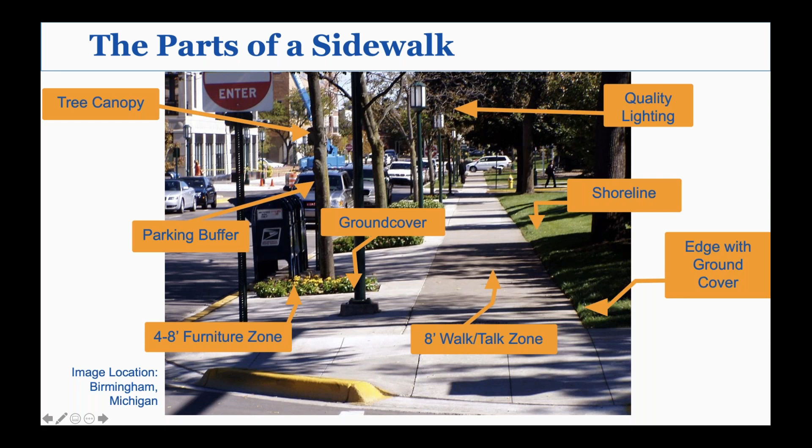I'm going to give you just a real brief element on the sidewalks. Last time we met, we were able to cover comfort, width, condition, setbacks -- very important -- the feeling of security, and the level of shade. So just real quickly, I'm sharing with you some of the nomenclature that comes to us through engineering, through landscape architecture, and additional language that we develop just to enhance and improve walking. These are just examples of those elements of a sidewalk.

So I wanted to show the diversity of sidewalks. But let's start with fresh material now. As I mentioned, we always get into crossings. It's just essential. If a person can't get across the street, then we don't have good movement, and we don't have opportunity to move from place to place, visit shops on the other side.

Whenever I can, I will lead a walking audit, or precede a walking audit with an in-workshop setting, maybe just 20 minutes, but I like people to understand the complexity that the engineer faces to make crossing safe.

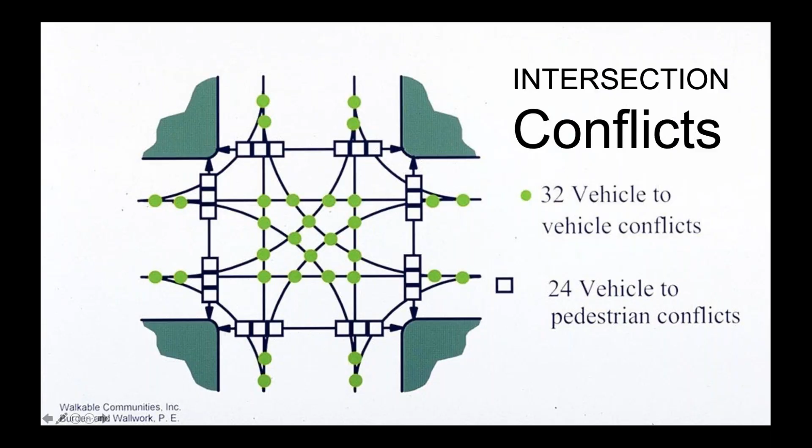Intersections by definition are a place that you go to have conflicts. For pedestrians, there are 24, you can see them mapped out here. And it's a very complex thing to build a safe intersection.

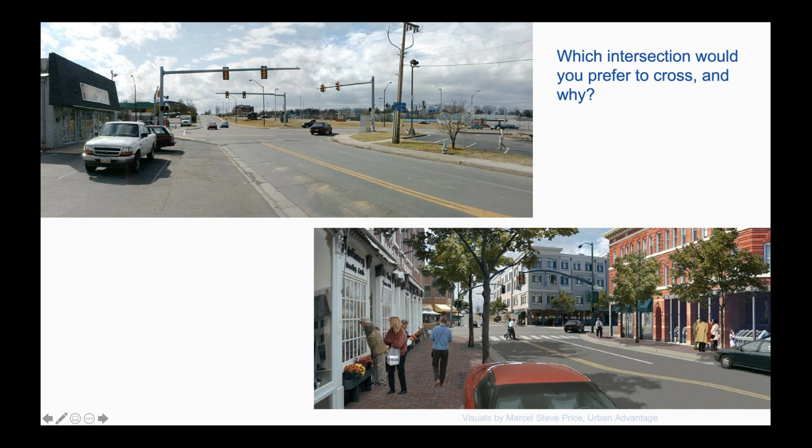So this is an important point. Let's see if, there we go. Now let's get into the non-signalized intersection. They're the simplest to introduce, but we have many issues.

The markings, what is the speed of traffic, the width of the curb radii - I really want to make an emphasis on that, and we'll talk about that. What is the proper lighting? Any intersection should be well lit. And then what's the visibility? And then the type of traffic control.

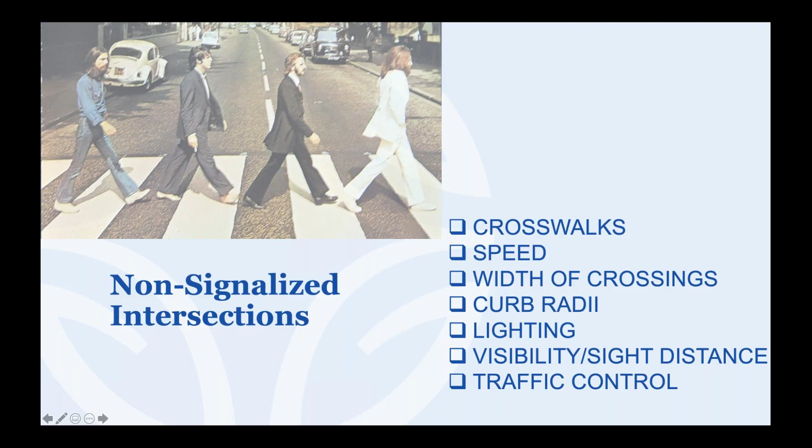So let's start with one of the most important, and that is the radius. Here's Kara Seidemann in Cambridge with probably a 2 foot - what would you say, Mark? A 2 or 3 foot radius? Yep, outside. Yep.

Here's Michael Wallwork, where he was actually almost taken out about 6 seconds after I took this photo because the radius is so wide. Even though he had the green signal or the walk signal, the motorist was not going to yield to Michael. So keeping the radius to the right level is the most important thing to do to come up with a compact intersection, whether it's signalized or unsignalized.

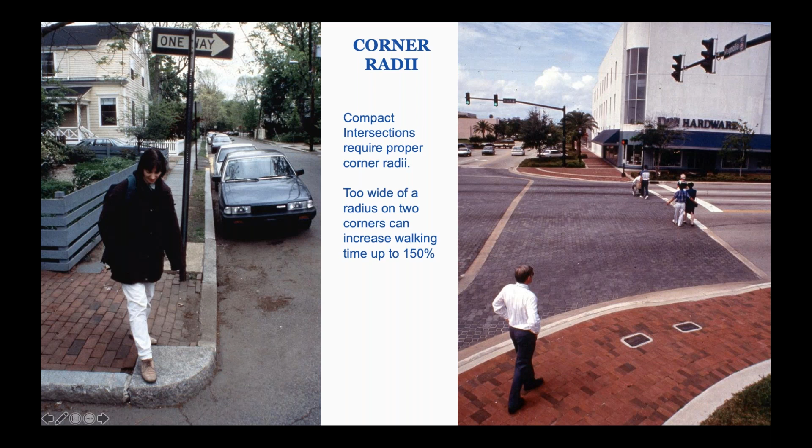So as a compact, unsignalized intersection, be thinking, if you would, what treatments you see here that you like and which ones you might enhance. In just a moment, I'm going to ask Mark to talk about the things he sees here, and then I'll show the answers I've come up with.

And I have to acknowledge something really important. We'll get in conversations where somebody will say, yeah, but the biggest fire truck in the fleet or a tractor trailer truck can't make it through here. And so there are two questions. Question number one is, should a tractor trailer be able to get through this street? Maybe the curb radius doesn't have to accommodate that.

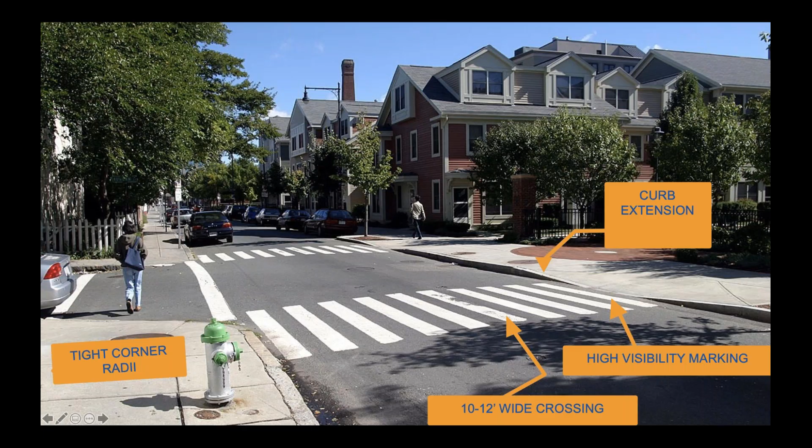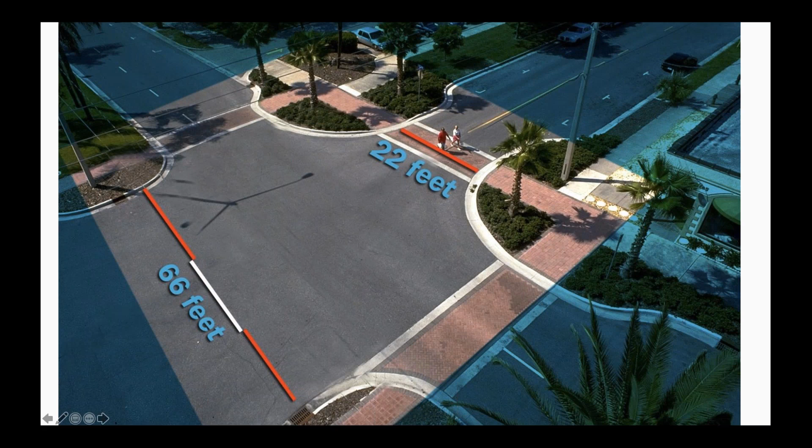To really make that point about the importance of curb extensions, notice this intersection has 66 feet if it does not have curb extensions, and only 22 feet of exposure. Much better sight lines for motorists to see pedestrians, and likewise for pedestrians to see motorists. Really powerful effect.

Now let's go to the tough one: signalized intersections. Again, we look at almost all the same categories, but we now add in some other tools that become important when we apply them. So let's get into the details.

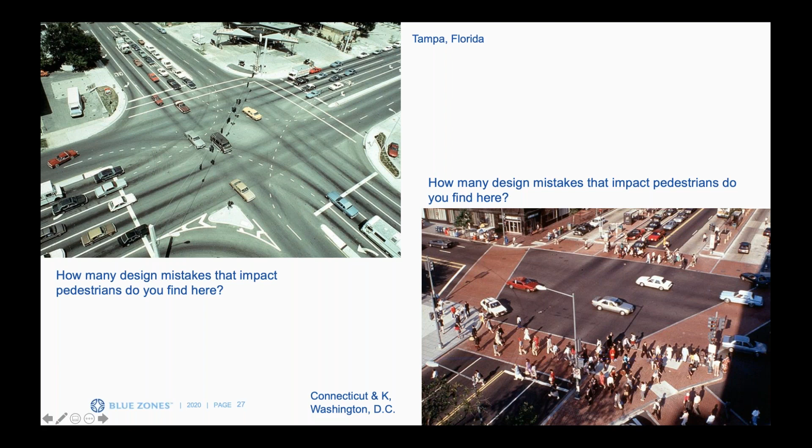But the one up on top may be in the bottom third of the intersections I found. In fact, notice there are many mistakes. I count 48 different mistakes in the ones you see here.

Another one that I like to accent the qualities of a good compact but signalized intersection. This had been a 4-lane street, now a 2-lane street, but widened at the intersections - that's where you perform all the work. Notice how narrow the crossings are. The radii are as tight as they can be within reason. When you add bike lanes, you can tighten down the radii even more, simply because the receiving width becomes greater. Same thing with parking if you didn't have curb extensions.

Mark, what would you add to this? What do you see that you like with this particular intersection?

I'm pleased about how they deal with the transit stop, keeping it central - so often we see transit stops down the street. We don't talk a lot about transit during this workshop, but frequently in our walk audits it's central. If you look closely, you'll see the transit stops on both corners are close at hand. If you put a transit stop at mid-block, you make users go way out of their way or cross mid-block, right? It's a little thing we sometimes overlook, but not on the walk audits - we make sure to talk about transit too.

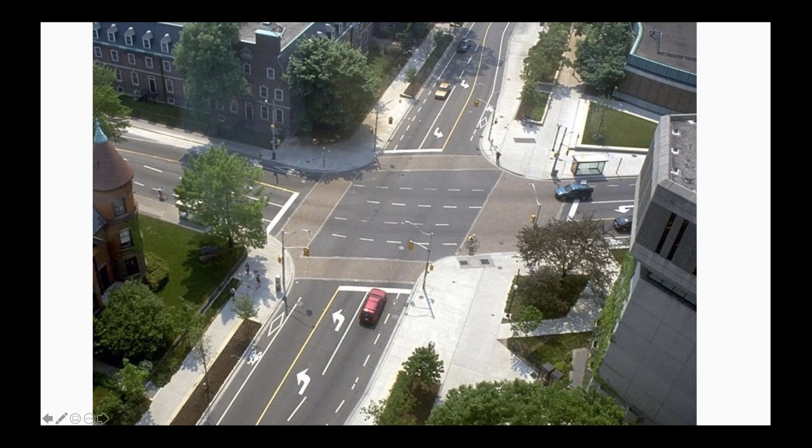Excellent. Now I'm going to do a quiz for everybody here. This won't be a poll just for time's sake, but notice this intersection has 4 different crossings that we call pork chop islands - if you look at them from the sky, they actually look like a pork chop. But it seems like they assigned a different engineer to each of the 4.

There's one that's much safer than the others. I hope each of you picked number 4. It brings the motors in at the lowest possible speed, gives them the greatest sight lines, and it's not even perfect - pork chops can be designed so much better than these.

But look at number 2. Motors could enter that crossing easily at 30 miles an hour, and the faster they can go in, the less likely they're going to yield to a pedestrian or even see them. So again, this one is kind of bizarre - it's as though they had no rhyme or reason for what they did, but somehow by chance, number 4 turned out to be a better intersection crossing.

Can I throw a point in here quick, Dan? Oh, please, let me go back. One of our jobs, and it's great - illustrate it with that photo. Go right ahead to the photo.

Remember where the driver is looking as they're entering these slip lanes, the right turn lanes - the driver's often looking left to check whether there's traffic in the lane they're entering, meaning they are not looking right toward where the pedestrian could well be stepping off the curb to make the short crossing from the curb to the crossing island. So if you think about a driver who's looking left, you've got to think about what you can do to give that pedestrian a better position - more visible to the driver, not letting them sweep into the turn at speed, knowing full well the driver's actually often looking out at the travel lane.

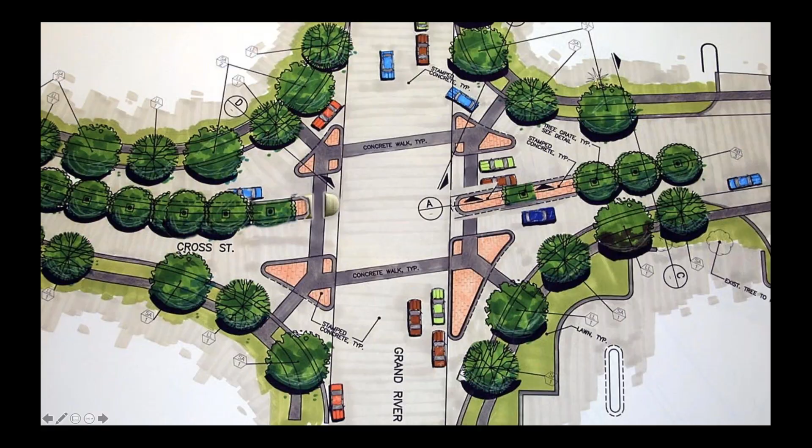Dan, you back with us? It looks like he's offline right now, Mark. Oh, all right. If you'd like, we could switch to me. Maybe we should. Why don't you go ahead and give me the screen, guys. And Mark, I know Dan is actively trying to rejoin, just an FYI.

Okay, go ahead. What Dan's going to do is have us look at a few more intersections here, and he does some really nice pre and post work. So again, we might on the walk audit ask people to experience this intersection, either look at it or even cross it, if we can do it safely with the group during the walk audit, and then say give us a score, how do you like it and what does it do? And then what we really love to do is invite them to imagine how they might improve it.

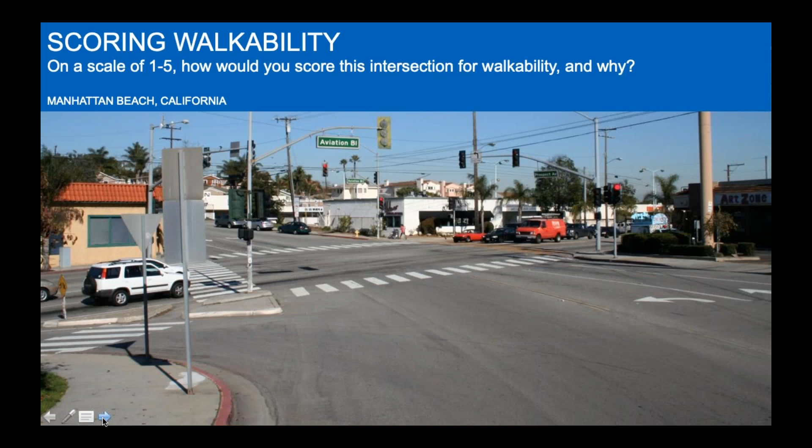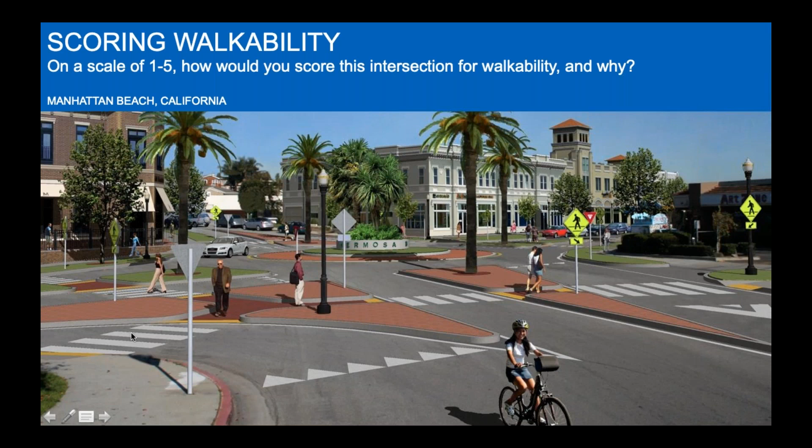So we might say, you can even render that. So this is actually a photomorph, a rendering of how that intersection could be done as a single lane modern roundabout. And by the way, one of the ways to keep the capacity up if you need it is to still keep turn lanes, slip lanes like the one here on the right. So there is a pork chop island here, but notice you've broken the pedestrian crossings up into a lot of individual one-lane crossings. No pedestrian is ever facing multiple threats at any time, even if you do allow for this right turn vehicle movement.

So these are important things to think about and to get participants to imagine when you're out there doing the audit, to paint some of these pictures. Often Dan will give a talk beforehand and show images like that and ask, what could you do with this intersection? What do you like about it? What's working for you, what's not? And this is a great example, by the way - this is the perspective of the driver who's coming in. If I've got a green light right here, I could well be just looking left, seeing if there's traffic coming from the left, before I make my decision to go right here. So we want to be very aware of that.

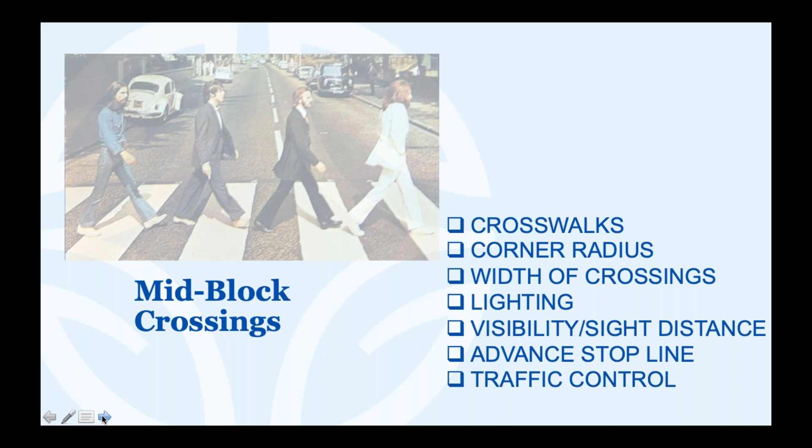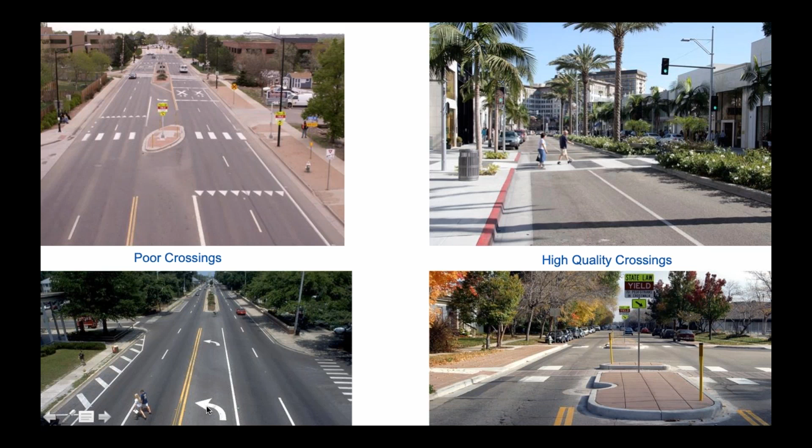Again, we're back to this idea of separating the task, allowing the pedestrian to cross with a finite number of well-defined conflicts rather than having to run out to the middle. Because we regularly see pedestrians in the picture in the lower left, literally going out and using the turn lane, as you see with the two pedestrians at the very bottom of the left picture, using that turning lane essentially as the median. They'll get halfway out, wait for a break from traffic in the other direction before moving ahead.

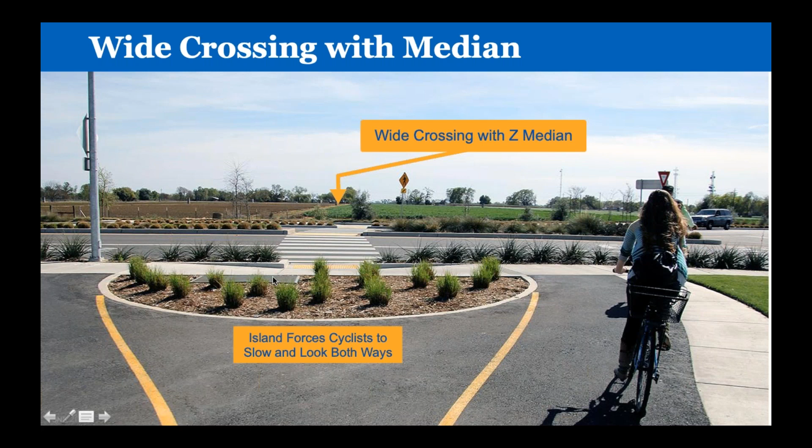Based on volumes, based on speeds and other issues, what additional tools the engineer brings in. Let's go to the next Davis mid-block crossing. Do you want to mention that the Z offset here also forces the pedestrian or the cyclist to look toward oncoming traffic as they pass the center island? Just to make sure that combination is really improving user eye contact in both cases.

I have mixed feelings about this one. I love the width, I love the fact that it's a raised crossing that slows the motorists down. I am not an advocate of putting posts where the pedestrian or bicyclist is having to deal with encumbrances put into trails, but they've done a splendid job in bringing the speeds down and putting a number of the other elements together. Mark, what's your feeling on these post-mounted posts?

You can't help but, if we're really trying to do inclusive design and think about people across the spectrum of ability and disability, a visually impaired pedestrian could walk right into that - there's no curb level warning if I'm using a cane, for example, to warn me of this. So from a design standpoint, we'd expect a more thoughtful application. If we think we need to put posts there to keep vehicles from turning onto this, recognizing it's not a motor vehicle lane, then let's think about how we do it in a way that's going to work for all users, including a visually impaired user.

Absolutely. And on the next one, I love these lean rails - it's a tool I picked up in Australia and brought back to the country, and it allows the bicyclist to put an arm down, not have to come out of the clips, and it increases the yielding behavior of bicyclists. But look at the excellent markings, both pavement markings and signs and so on.

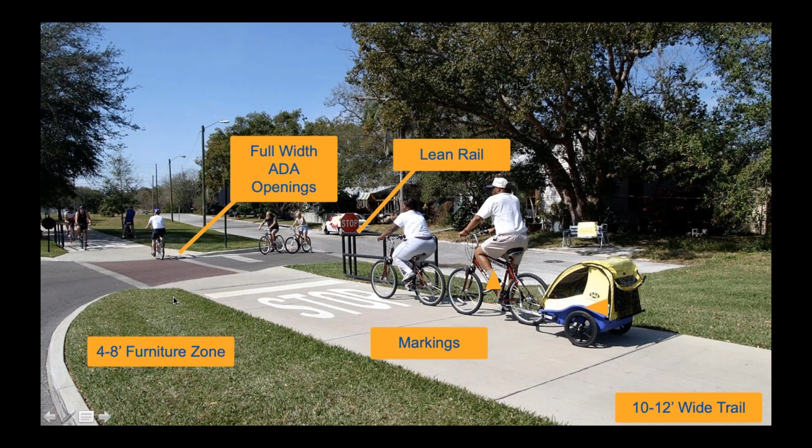So let's go to the next one. By the way, one of the tools I love is when we make the ADA openings full width of the crosswalk itself. You can't always do it, but there are so many benefits, and certainly true with the bicycle trail where you want the freedom for bicyclists to be able to go both directions at the same time - you need that full width. So well done, let's move to the next one.

Now get into the streets, and I'm going to start with local streets.

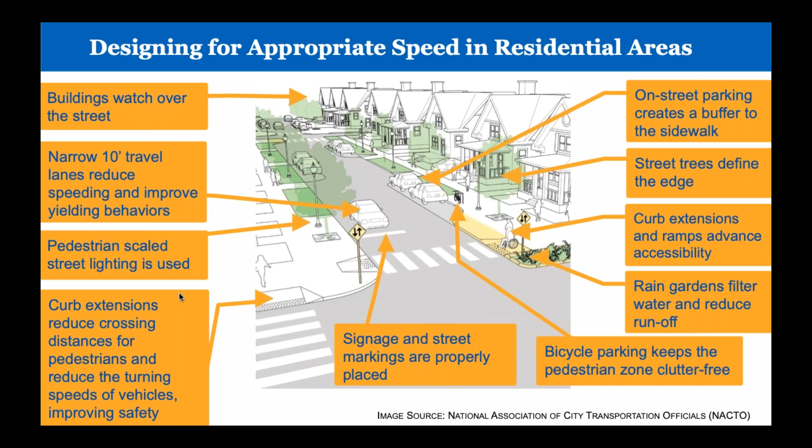Moving to the next example, shown here. Think about the things you like - what makes this one unique and distinct? In a minute, you'll see the labels.

There are some things you might not be as familiar with, depending on your trade or profession. Notice the curbless edge, no curb - this can be useful for a number of reasons, but drainage would be very high. I also personally happen to like valley gutters. They're not always appropriate, but they give an extra visual tightening to the lane itself.

With that, what would you add, Mark, that you note about this street? Notice that there's still a vertical curb over here on the edge, so we're keeping vehicles from parking beyond where we want them to. You really define the parking lane here, which can be important depending on what's going on back of curb, and whether the sidewalk's right there, or in this case, we have the nice separation.

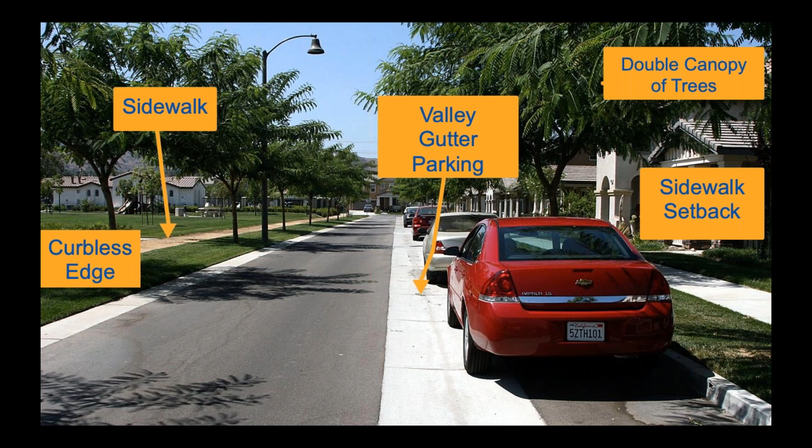So there are times you don't have to do the same thing everywhere. Curbless on the left because we're allowing drainage to get natural infiltration, stormwater running that way. On the right, though, we want the vertical curb. It's okay - that's what engineers and designers should do, design to the context and be clever in that regard.

Absolutely. Now let's go to the collector street. As we go up in the function of the street, the collector collects all the traffic off of the local streets.

My personal feeling again is collector streets should not be fast. They have a very important role to play. All they really need to do is handle the volume of traffic and not induce too much speed. 25 is fine for many, 30 yes. When I see a collector at 35, I just go crazy - why did you need to do that? You either built a bad system that you're having to move more traffic at higher speed, but let's try to keep everything sensible. Note that all pedestrians, bicyclists, everyone are forced out into the collectors off of the local streets at some point. We've got to keep them sensible.

Moving to the next slide, this gives us a contrast in the way this street was designed. This is a pretty high-speed street - most motorists would probably do 35, some even faster. And there's no reason in that. You hit your maximum capacity in a road somewhere between 25 and 35, but 30 is plenty fast if we're worried about capacity of a street.

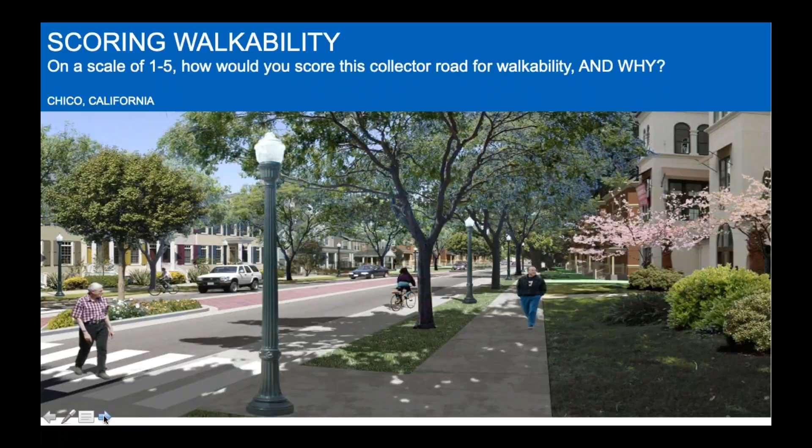Mark, any addition? I'm going to add that your zoning code matters. Bringing those building fronts to the street changes the visual aspect ratio of the corridor. Even if you don't move the curb line, there are studies that say drivers will behave differently just by virtue of a single-story building becoming two stories, or a building set back 60 feet being only 20 feet off the curb line. They change the visual aspect ratio of the corridor, so your land use and zoning requirements play very much into how the street feels.

Excellent. Let's go to the next - and with the next, that's still a collector, but notice the challenge the engineer has.

They were able to come up with a detached sidewalk for the most part, but for some other land use function in the immediate block, they had to go to an attached sidewalk, but they made it very wide, and with the bike lanes, it's not as bad.

I love the triple canopy. There's so much more landscape architects should be able to do to engage, not just to make roads beautiful, attractive places, but to help bring down the speeds.

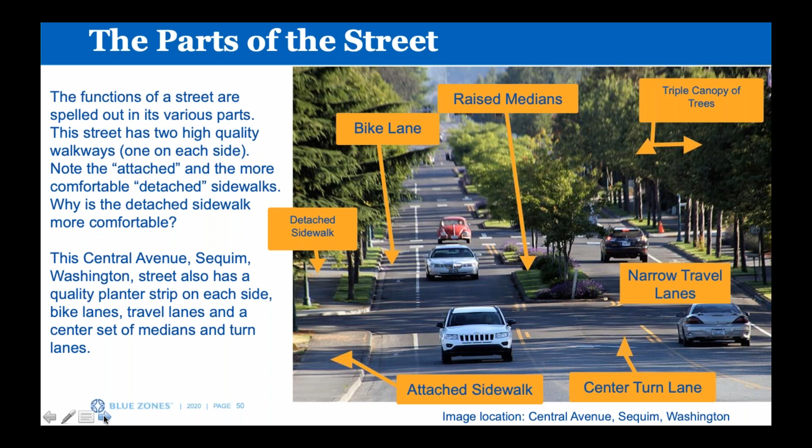I'd much prefer this come from the group organically, but if it's not, you can throw out questions that might lead them to thinking about the canopy, how many trees there are, how good the shade is, or how much separation they've got from the lane. That's part of your job as a facilitator, not to tell the answers, but to evoke people's observations.

Fantastic. On the next one, this is a community called Watercolor. This is a state road, a coastal road in Florida. I consider this almost nirvana. If I had to take credit for any particular street, which I did not design this one, I would want to take credit for this.

Notice all the beauty they've added in, the eyes on the sidewalk, the street. This road probably rarely sees traffic speeds above 15, and yet it's a major state road along the coast. It connects into Seaside, other important places. But look at all the tools they used. Hopefully as we're going through this, the tools that do the most are becoming very common in the language.

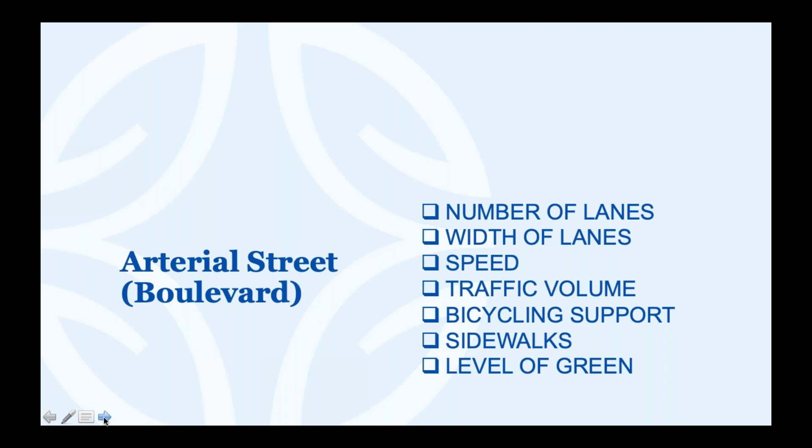Quickly, let's move to arterial streets. I'm trying to watch the time. Again, you'll see mostly the same techniques. The higher we go up in category, the more critical it is to support bicycling as well as walking. So let's go to the next element.

Mark, what would you add? Oh, yeah, only that you've got to acknowledge not every community is going to have the same resources. So let's realize not everybody can plant vegetated medians, and in a place like Mesa you'd have to irrigate that, so you're going to have to think about what works for your community. Can you use native species? Can you use another material? In New England, we often see things like crushed shell in a median, which is lower cost to maintain than a vegetated one, and I always on the walk audit invite that kind of creativity.

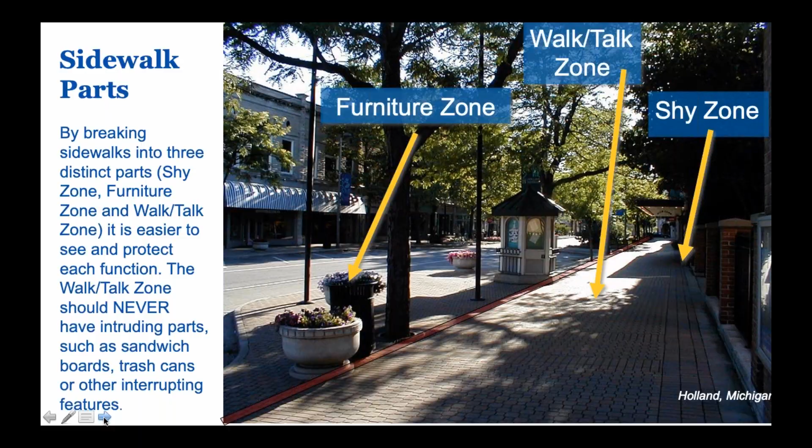We're up to the sidewalk parts, and here is where you remind people that there's a furniture zone, the walk zone, and then the shy zone at the building front. That's probably familiar to a lot of planners, kind of a standard. There's a great shot from Holland, Michigan here, and acknowledging that those are going to be different in different places, but they are really instrumental, particularly in business and retail districts, to get it right.

And with that, Mark, I'm going to turn it over to you so that we can stay on schedule and have plenty of time for discussion.

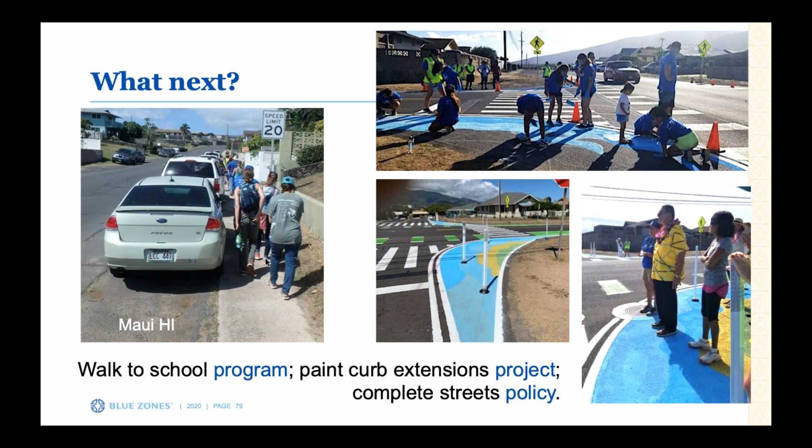Last couple of thoughts. Can we go virtual? I think it is viable to do so, and I'm going to give just an example. I'm not going to give a full talk on virtual walk audits.

I'll share the idea. I worked with the Safe Routes to School Student Ambassador Program the YMCA of New York held. We had hoped to convene all these students and many more, though not all are pictured here. It was a great program. We had hoped to meet together in Albany and do a walk audit together, then the kids were going to go home and bring walk audits back. They couldn't, due to the pandemic.

So what did we do? Well, they came up with really clever ideas. I'll share Matthew Tobin from Tappan Zee High in Orangetown. He actually created a Google Doc of a virtual walk audit.

There's instructions there. He told people, think about these four things - stuff we had talked about through a series of webinars. He showed people the map of the route he was going to take them on. He invited local officials, school officials, public health, transportation, safety, public works. And then he took them on a walk.

He said, okay, we're going to walk this block, and here's where the concrete sidewalk is. Here's the crosswalk right in front of the school. Here's a part of the asphalt sidewalk. He had a series of photos.

Some of the students used little video clips, and then he asked them to rate, and then he asked them to react - tell me, what do you like? What didn't you? What might you improve?

And he got responses. In fact, some of the students that tried to do live Zoom walk audits didn't have success getting people to sign up, but they did when they made the Google document available, and if they said do this anytime in the next week, they got feedback from community participants.

My point only here is, let's be at least as creative as those young people who showed me a half dozen different ways to think about walk audits than the way I'd been doing them for 35 years.